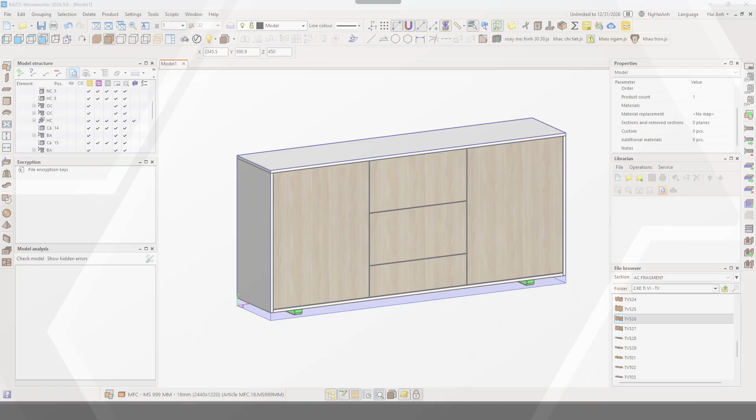Hello everyone! In this video, I will guide you on how to install hardware connectors and fittings for your products in Bazis. We have 3 methods to do this.

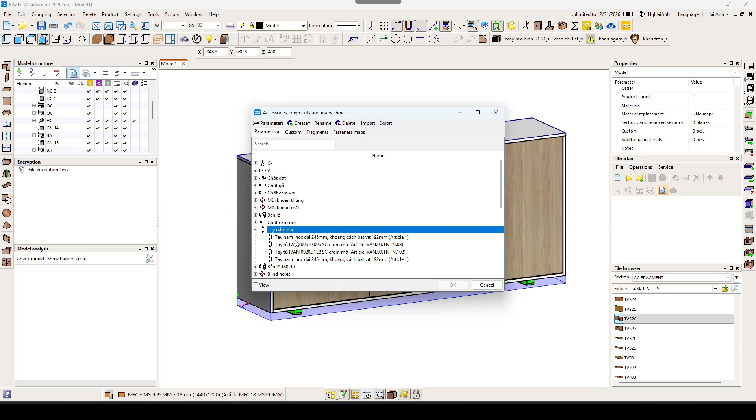The first method is manual installation. Click on the hardware command, select the fitting you need, for example a door handle, and click OK. Next, select the mounting surface. Here, you can adjust the rotation angle, let's set it to 0 degrees, and then click on the exact position to place it.

That is how we install hardware manually.

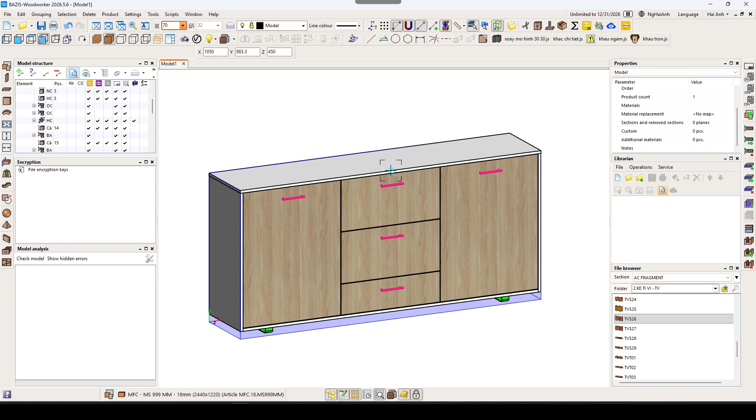The second method is automatic batch installation. Select the components where you want to add fasteners, or press Ctrl-A to select everything. Then click on Auto Joint.

Let's switch to wireframe mode to see things more clearly. The software will display identical joints. You can cycle through the target locations by clicking Next Joint.

To choose the fastener, click on the Mapping section, select the corresponding hardware map, and click Install.

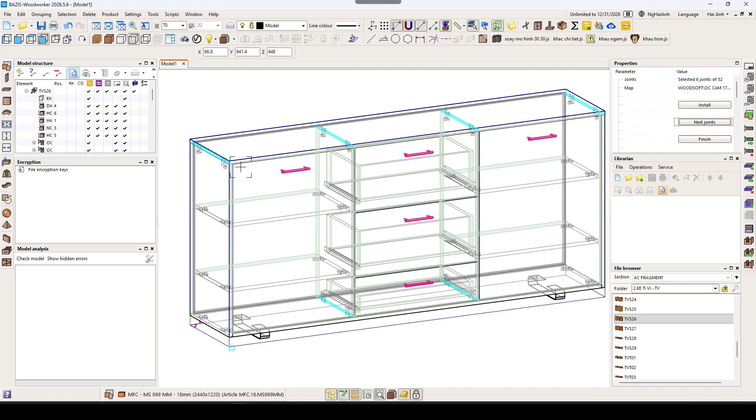If you need to flip the camlock drilling face, simply middle-click on the joint location. This will reverse the drilling direction to the opposite side. Once adjusted, click Install.

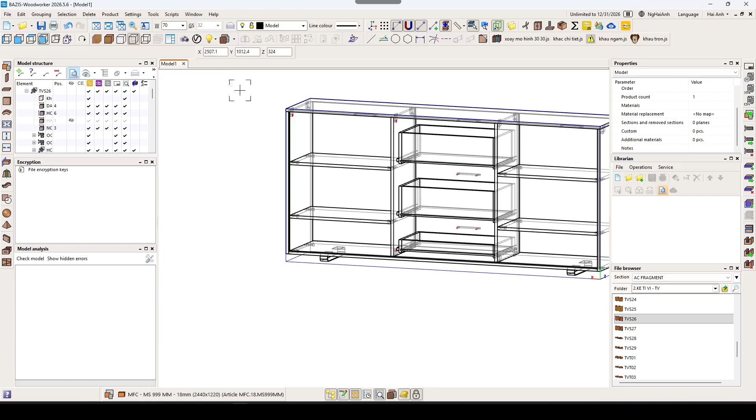The third method is using predefined fastener maps. Click on the Hardware menu and select Fastener Map. For example, I will install a straight hinge, then click OK.

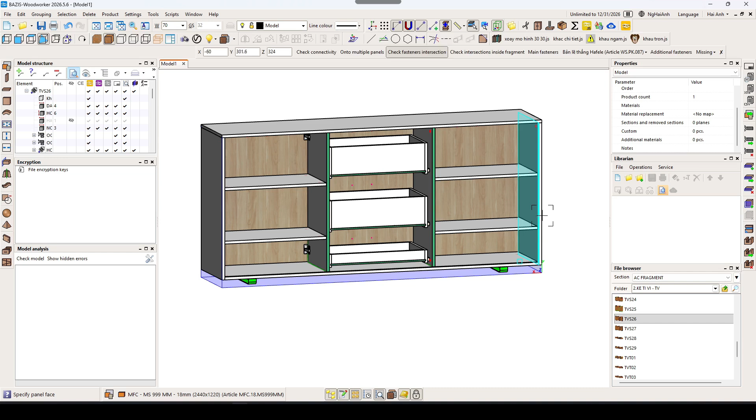Now, simply select the 2 matching surfaces or components, and the software will automatically mount the hinge based on our pre-saved settings. Those are the 3 ways to install hardware and fasteners in Bazis.